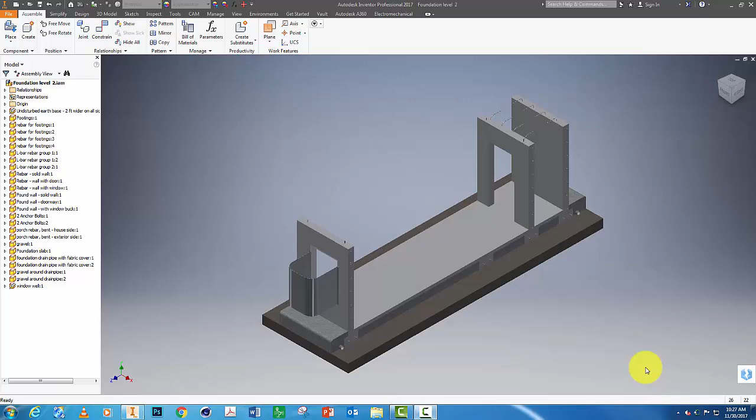We're now ready to start building the main floor that will sit on top of these foundation walls. First item to place is in a folder called Main Floor. We'll be working out of here now.

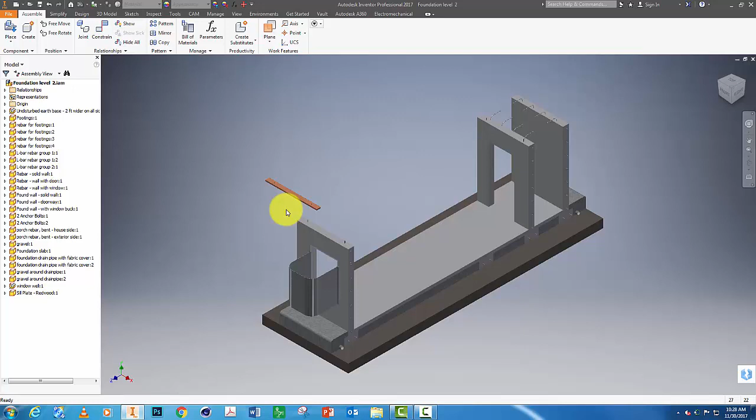Find sill plate 1, redwood. The sill plate is the very bottom piece that goes right on the foundation wall. There's usually insulation put underneath it to help keep bugs and cold air out. It's made out of redwood. It could also be made out of pressure treated lumber, but it has to be something that is rot resistant.

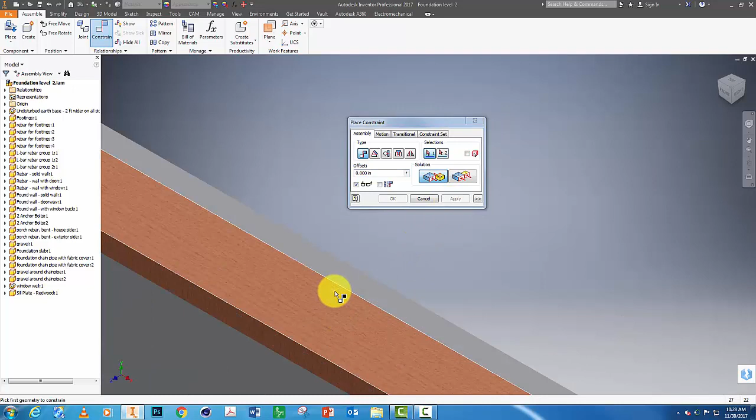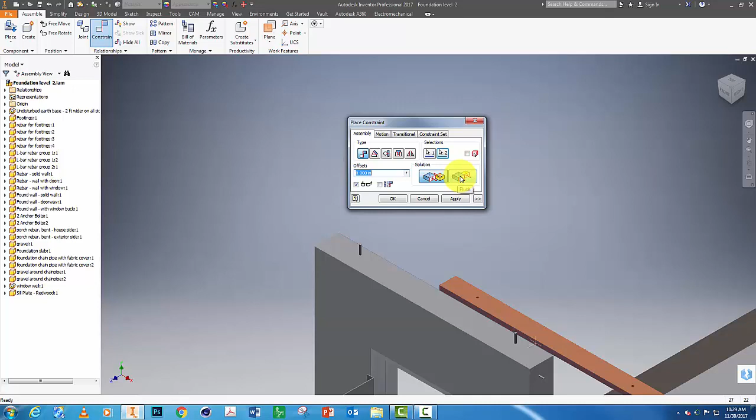Let's assemble this by first right clicking on the sill plate and choosing select other so that you select the bottom, and I'm going to constrain that to the top of this wall. Hit apply. Next I'm going to zoom in here and right click towards the back of this sill plate, select other so I can get that back face. I want to constrain that to the back of the foundation wall. Let's click flush and apply.

Remember, this house is going to have some bricks sitting here on this edge of the foundation wall. Last constraint, let's do this end to foundation wall like that and click OK.

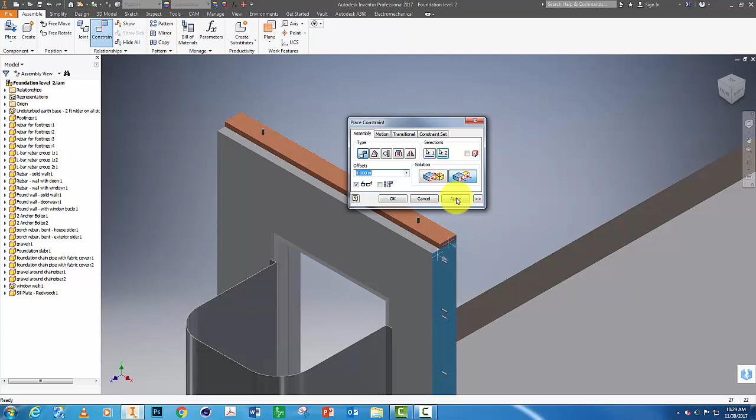Next let's put on this sill plate, which is slightly different. Go to place, sill plate 2, and constrain it.

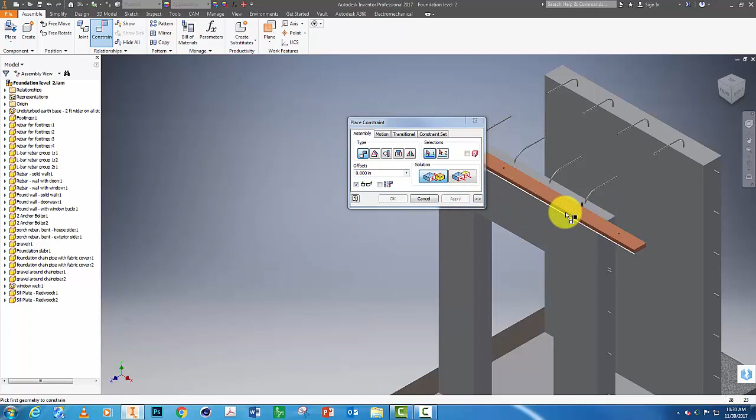Obviously the sill plate is not going to go on this outside edge. We're going to have our porch sitting there. So in this case we can constrain it like this. Let's hit flush, apply that. We want the sill plate to sit like that.

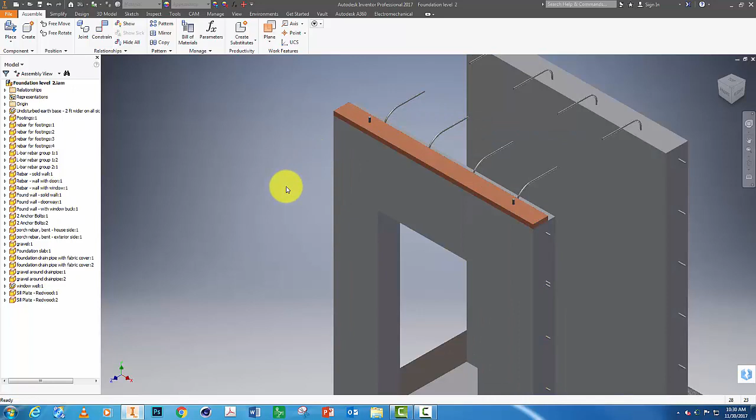Next, when a sill plate is put on a foundation wall, the holes are drilled, and then it's fastened down with a nut and a washer. We're going to do something a little different at this point that we haven't done yet. I'm going to close and save my assembly and start a new assembly.

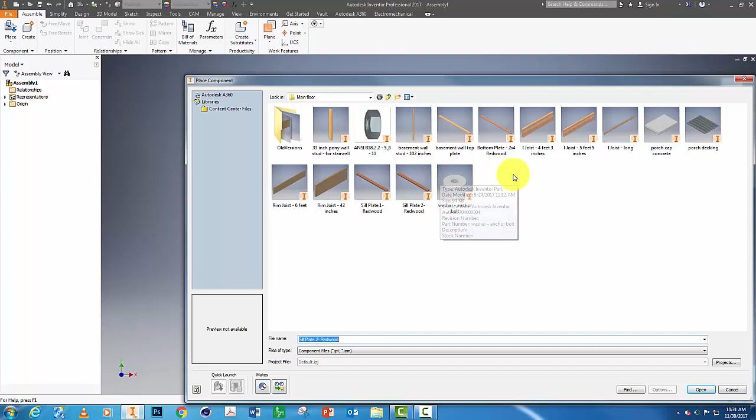I'm in the main floor folder, and I'm going to place a copy of this washer, one copy of that, and place a copy of this nut. I'd like to constrain these together.

We'll start by mating this to the washer and apply that. And then our second constraint will be center line to center line, and apply that. Let's save this.

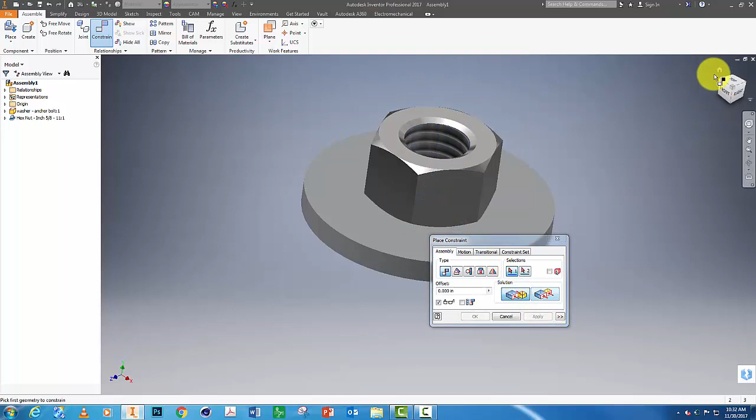Make sure you save it into your main floor folder, and let's call this nut and washer assembly. Click save.

Now I can close that and open my current foundation. If yours isn't saved exactly like mine, that's fine. Just make sure you save often. I've got two versions. This is my most current version.

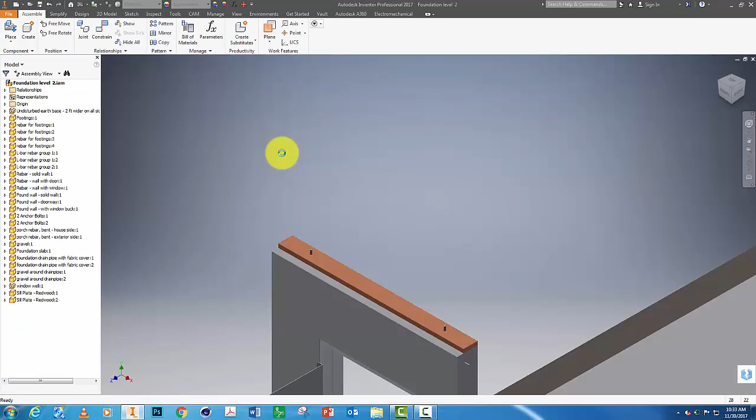Now we can go to place and we can select that assembly. This is called a sub-assembly in Inventor. Let's put 2 copies here and 2 copies up here.

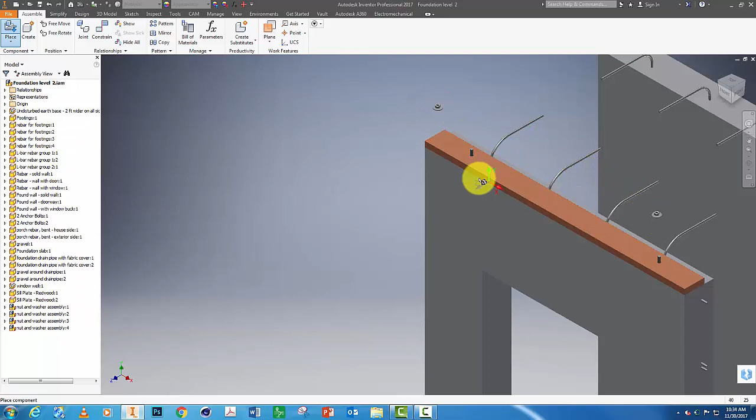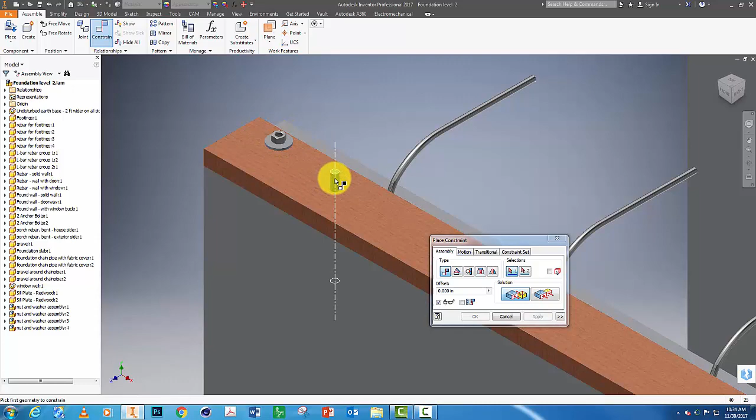We'll constrain those the same way we did previously. We need the bottom of the washer to the top of the sill plate, and then we need the center of the anchor bolt and the center of this subassembly, and apply. Please do that to the remaining 3 nut and washer subassemblies.